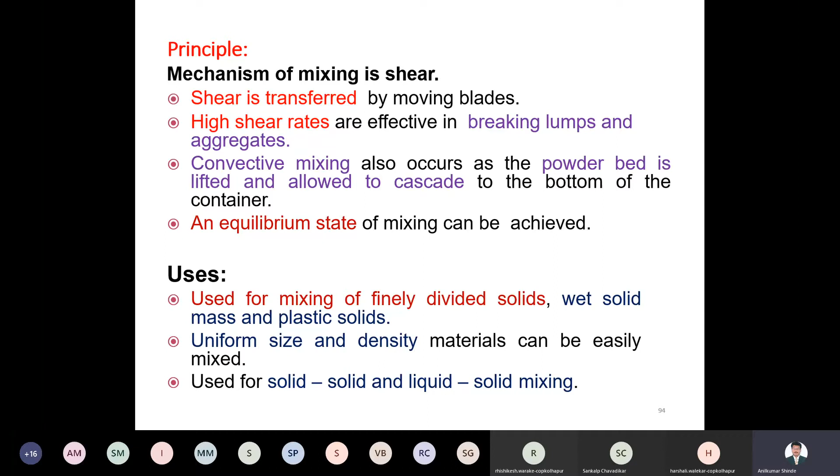The uses of the ribbon type mixer are mixing finely divided solids, wet solids, or plastic solids. Uniform size and density materials can be easily mixed. Non-uniform size materials or those with density differences are difficult to mix with this ribbon mixer. But materials with uniform particle size and uniform density can be easily mixed, used for solid-solid mixing as well as liquid-solid mixing - that is semi-solid as well as liquid-solids.

This is the first step, then the second and third part. Wherever there is a gap, you can attach different baffles - a small knife. After giving the speed to that knife, you can reduce particle size further, and 100% mixing is also possible.

So that's why this is an advantage - we can use different perforated baffles to cut down different particles. The particles can be reduced from larger size to smaller size through rubbing and breakdown of aggregates. You can rub the particles to reduce particle size from larger to smaller, and break down the aggregates to reduce particle size.

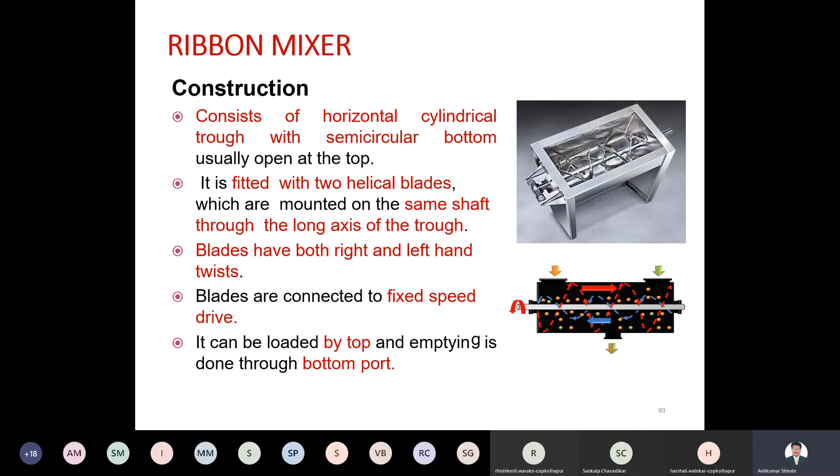So maybe at that side a dead spot is there. Dead spots means that area where mixing is not possible. So the materials at the corner of the mixer will not participate in the mixing. That process is called the dead spots process.

Dead spots are observed in the mixer though they are minimum. You can fix speed drive. The drive space is not suitable for fragile crystals or sensitive material. Due to the rotation of that speed, rotation of the ribbon, it may create temperature, and with the temperature it may cause melting of some of the substances, creating a problem.

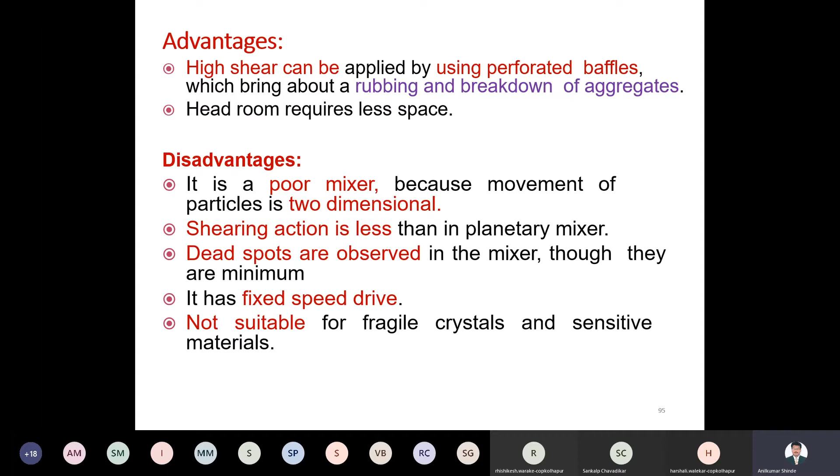So hygroscopic material or low melting point material cannot be used for ribbon type mixers, and nor can fragile crystals. Fragile crystals means very softened crystals. With this pressure and shearing force, we can reduce particle size and get fine powder. So very fine powder may be possible because the particles are very soft or fragile in nature.

Then next we'll see the next mixer, which is homogenization. We know that in our laboratories, particularly in pharmaceutics or QA laboratories, we have different types of homogenizers. Homogenization is a process, understand it. For this homogenization, we can use different types of equipment and instruments called homogenizers.

Homogenization is a process for converting non-uniform mixing to uniform mixing. Whatever is not uniform mixing can be converted into uniform mixing, and that is possible with homogenization. You can use different types of homogenizers for this. It is done for reducing particle size and making uniform distribution possible, to make the product uniform and homogeneous. Every particle is mixed 100% to form a homogeneous mixture with homogenization.

An example is converting a coarse emulsion to a colloidal emulsion. For the preparation of an emulsion, as you know, it contains two phases, oil and water, and oil cannot be mixed in water. So it requires the highest shearing force to reduce the particle size of the oil globules, reducing the size from the largest to the smallest.

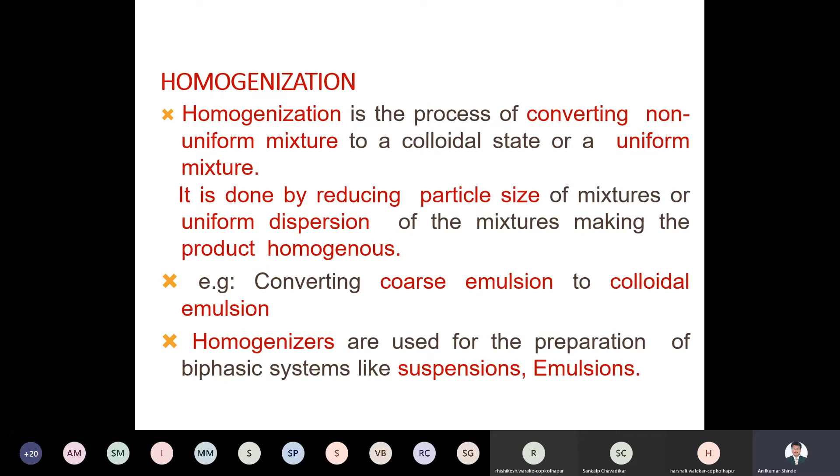So you can reduce its particle size. If the particle size of the solids is very high in a suspension, that suspension is not stable. So you can reduce its particle size from the largest to the smallest with the help of homogenization. After this, very fine particles are uniformly distributed into the liquid, stabilizing the suspension, and the same is true for emulsion also.

Then, for the homogenizers, we can use different types of modified turbines, which are called modified turbines.

So it consists of the turbine and stator. These are the two parts of the homogenizer you can use. This turbine and stator is fixed at a certain distance in the mixer. Rotation of the turbine at very high speed creates pressure differences, and due to that pressure it reduces particle size.

Different turbines and stators can be attached to the homogenizer, and by rotating the turbine at high speed, you create pressure. After creating the pressure, you reduce particle size, globule size. And you can prepare suspensions as well as emulsions - these are the biphasic dosage forms.

The next process is that, to reduce particle size, particles and fluid are passed through the stator and turbine, meaning that is the emulsion. If you want to prepare a very stable emulsion, the emulsion should have finely dispersed globules.

A coarse emulsion is passed through a zone having the highest speed of the stator and turbine, and due to that speed, it reduces globule size with the pressure created. With that pressure, we reduce particle size, reduce globule size, and after that we can prepare the emulsion. This mechanical force produces a uniform or homogenized mixture.

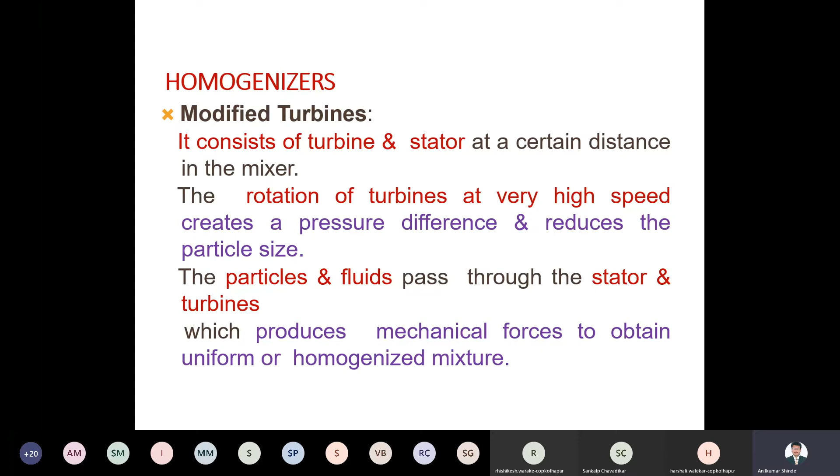A homogenized mixture is formed with the help of the homogenizer to prepare different emulsions or suspensions. Then we can use different types of homogenizers. The first is called pressure homogenizers.

With pressure homogenizers, we can create the highest pressure using a pump fitted in the mixer. With that pump, we can create the highest pressure, which reduces particle size from larger to smaller size, and finely divided dispersion is possible.

We can install a pressure pump, and with that pressure pump we create the highest pressure. With that pressure we can reduce particle size, reducing a very large globule size to a small globule size. This is called pressure homogenization, applied with the help of the pressure pump.

Then there's the ultrasonic homogenizer. With ultrasonic homogenizers, we use ultrasonic waves. In a pharmaceutical laboratory there is an ultrasonicator instrument, used for enhancing the solubility - this is called the ultrasonication bath.

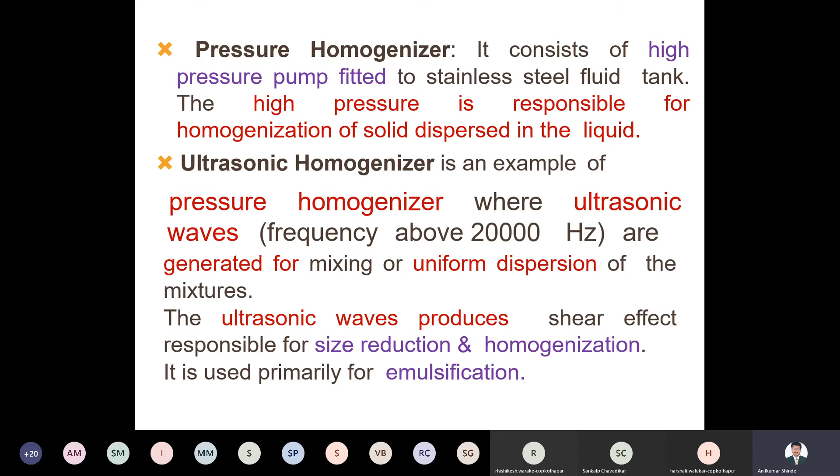Primarily, ultrasonic homogenizers are used to prepare emulsions, or emulsification. Homogenization is a process for preparing fine emulsion from coarse emulsion. A coarse emulsion is one that is not stable for a longer time because it has a larger globule size, which is why it's not stable.

So this coarse emulsion is converted into a fine emulsion - that process is called homogenization, converting from larger globule size to smaller globule size. The apparatus used is the homogenizer. The principle of homogenization is that the larger globule size in a coarse emulsion is broken into smaller globule size by passing under pressure through a narrow orifice.

Narrow orifice there. So we'll see in a direct instrument what is a narrow orifice. So this is a coarse emulsion which is passed through a narrow orifice with pressure, right? And after passing through the narrow orifice, it reduces the globule size from larger globules to smaller globules.

Understand it? So commonly used homogenizers are hand homogenizers, Silverson mixer homogenizers, or colloidal emulsifiers. So the first is hand homogenizers. It's not operated by a machine or motor. You can just operate it by hand. It's based on the principle that the larger globules in a coarse emulsion are broken into small globules by passing under pressure through the orifice.

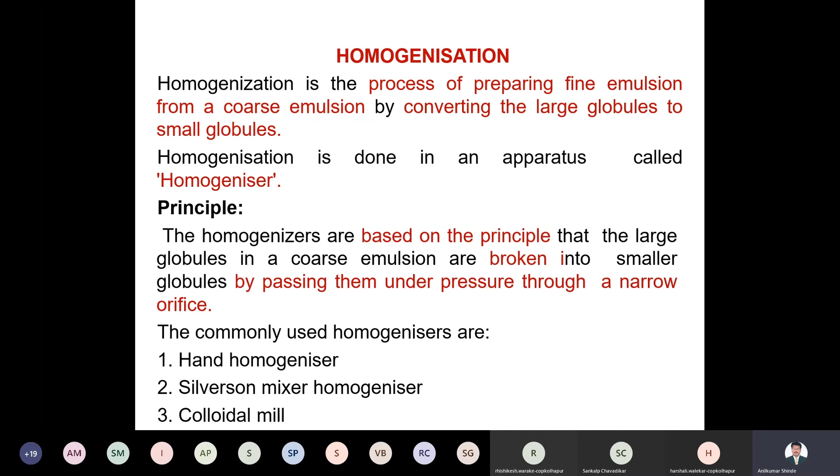Then the working: the emulsion is prepared in a mortar and pestle. This is a coarse type emulsion. Then the same emulsion is put into the hopper. Then the piston is operated. This is the hand operated piston, and this piston creates the pressure. So this handle is also called the piston.

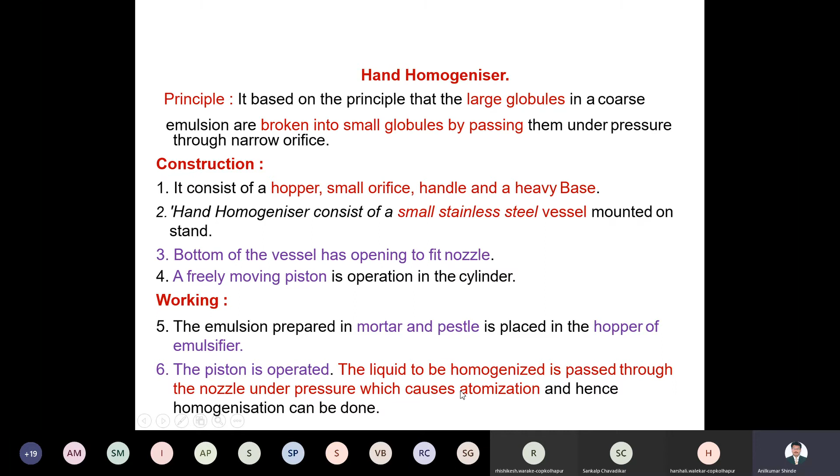Then the liquid is homogenized and passes through the nozzle under pressure. After creating pressure, the coarse emulsion passes through the nozzle, which causes atomization. Atomization means you reduce the globule size from larger to smaller, and homogenization is possible. So this is the hand operated homogenizer.

The second homogenizer is called the Silverson homogenizer. So what is meant by Silverson homogenizer? It is the name itself. The name is given to that homogenizer. It is called the Silverson homogenizer.

So it works on the principle of the combination of mixing and homogenization. These are the two principles: mixing and homogenization. In construction, the Silverson homogenizer consists of the emulsifying head, to which a number of blades are attached. It is surrounded by fine mesh sieves made of stainless steel. The head is rotated by means of a small motor which rotates the blades at very high speed.

Excuse me, sir. Sir, can you take the previous slide, Silverson? So you say it's the same as Silverson. Sir, previous slide. This one. Yes, sir. Just a minute. So we'll go afterwards, right? Just we understand that figure, then we go before, right?

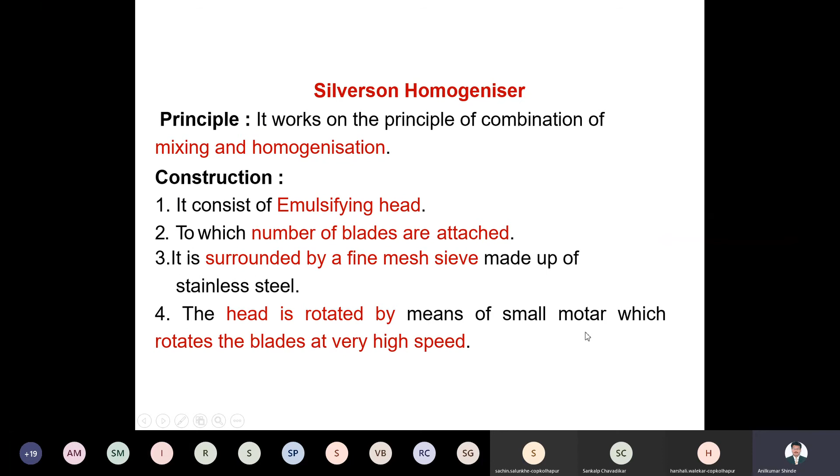Then the head is rotated by means of the smaller motor, rotating the blades at high speed. So that we have seen. Then the emulsifying head is immersed in the liquid. We have seen the head. So the head is immersed in the liquid to be emulsified. Then the liquid is mixed, sucked through the fine mesh, and the oil is reduced to fine globules in this process.

So liquids which are mixed are sucked to the fine mesh, and oil can be reduced into fine globules, right? This is a process of emulsion. The process of mixing occurs at the highest speed of rotation of the blade. So mixed material will pull out with great force, and the process of homogenization will occur. That is a simultaneous process.

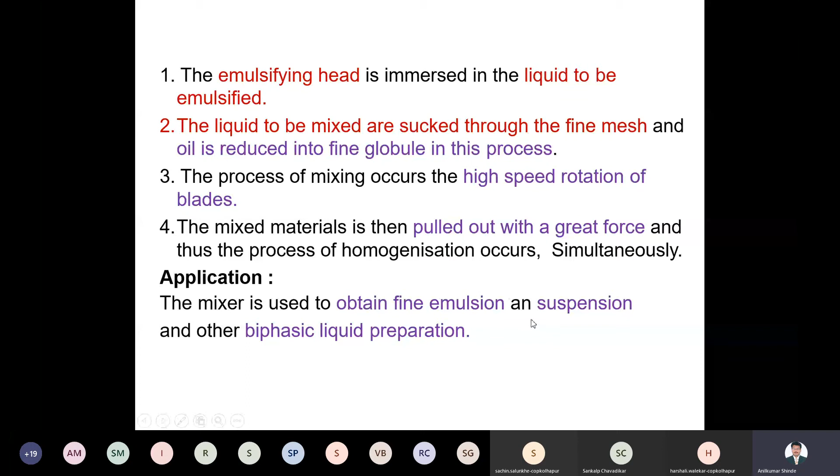Mixing and homogenization are a simultaneous process there. So mixing or homogenization is possible with the blades. Different blades are used. The application of the mixer is to obtain a fine emulsion or to obtain a suspension. Those are the biphasic liquid dosage forms. Suspensions or emulsions can be prepared with this, right?

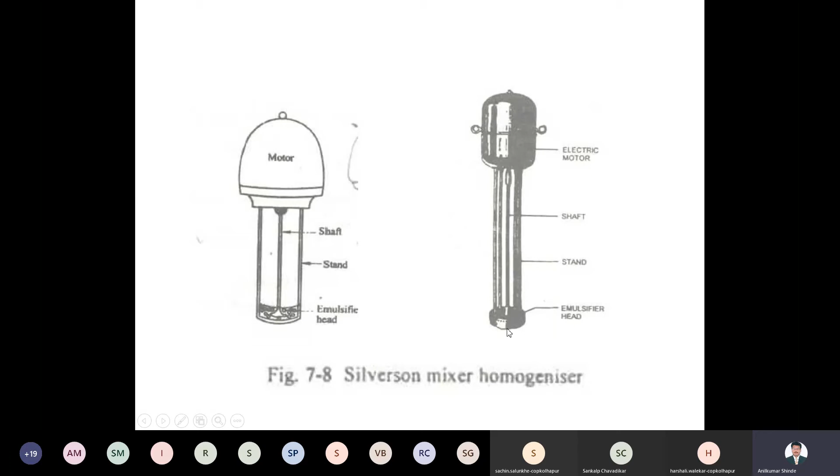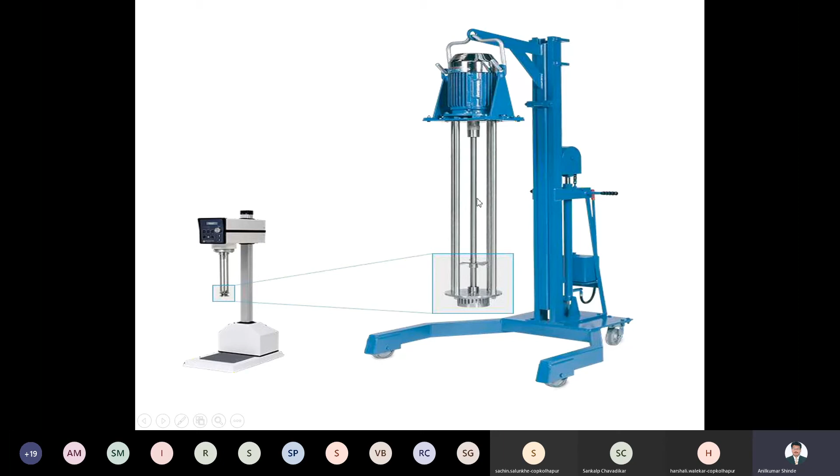And this is a small size. It's a larger size. This is a small size. So if the preparation has a very small amount, maybe 10 ml or 20 ml, that type of homogenizer can be used. If the quantity is more, maybe 1 kg or 2 kg, the larger Silverson can be used. So depending upon the emulsion quantity, we can use different sizes of the Silverson emulsifier.

Then next is mixing equipment. For that, we can use two different types of mixing equipment: batch mixing and continuous mixing. Batch mixing means the mixing of a specific and limited quantity of material. If the material is a very small amount, you can use batch mixing. Batch mixing means you can prepare the suspension or emulsion batch-wise, maybe a 1 kg batch or a 2 kg batch.

But in continuous mixing the batch size may be hundreds of kg. So this process is continuous in nature, right? So the equipment used for both is different, because in continuous mixing and batch mixing these components may be different, or the components are common. The components are the same, but only the size of the mixer differs, smaller size as well as larger size.

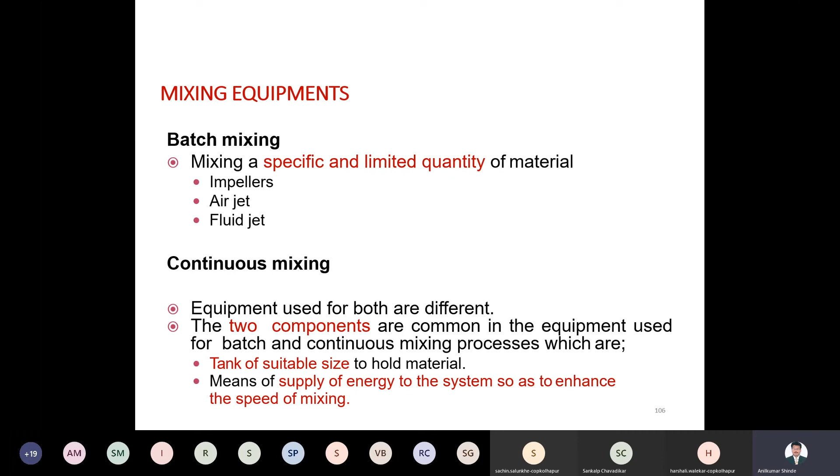For the larger size mixer, we can use a larger quantity. The smaller size mixer we can use for the smallest quantity, right? But all the systems are the same. There's a tank of suitable size, so you can use different tanks. Then you can supply energy to the system to rotate the shaft, rotate the paddle, and we can create force and pressure, and then reduce the larger globule size to the smaller globule size with the help of the speed of mixing, right?

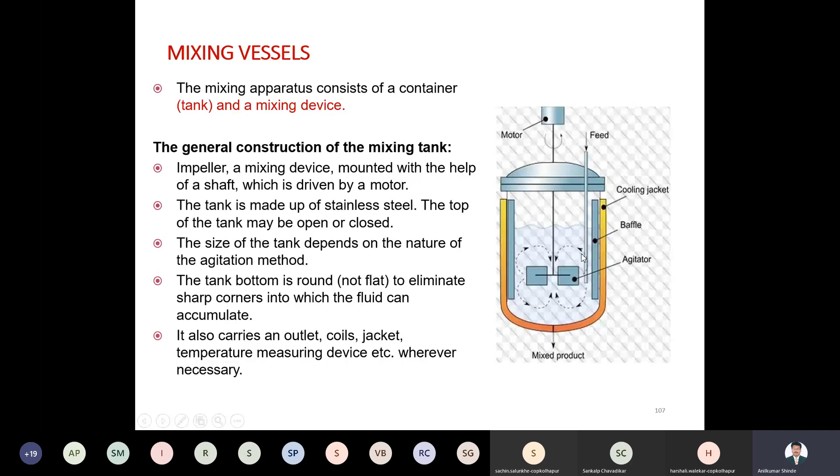So it also carries an outlet, the coil is required, the jacket is required, and a temperature measuring device is also required. We can use a thermometer to check the temperature, or a temperature sensing cord. You just immerse it into the liquid and see the temperature inside, right? So these are the different components of the mixing vessel.

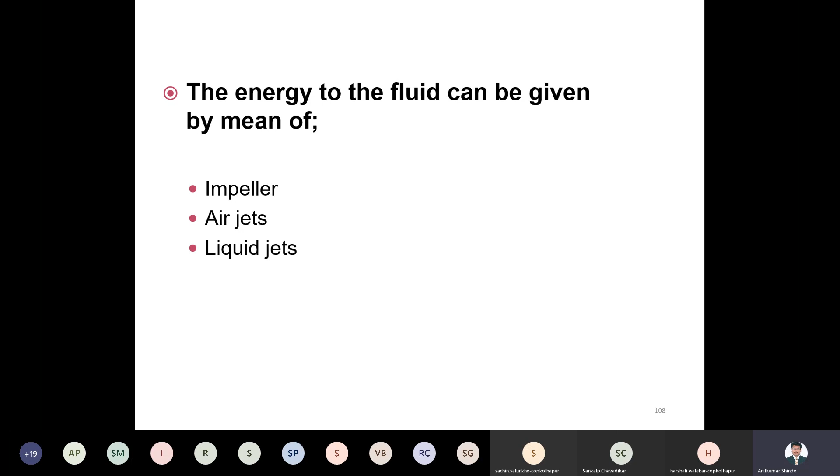So energy is required to create pressure. By creating pressure we can reduce larger globule size to smaller globule size with the help of impellers, air jets and liquid jets, right? We will see that part in the next lecture, okay?